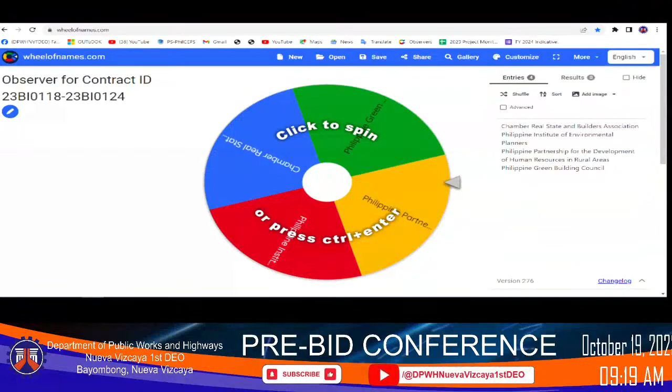Sir, here is the official observer from the Philippine Institute of Environmental Planners, represented by Ms. Ana Maria Pulido, Environmental Planner. Thank you, Engineer Brian Augusto.

So our official observers for the procurement activities for these 7 civil works projects, particularly we have the resident auditor, the representative from the National Philippine Institute of Environmental Planners, represented by Environmental Planner Maria Ana M. Pulido, and the third observer is Engineer Gladys G. Tiburcio, alternate observer for the National Contractors Association of the Philippines Incorporated, Aritao, Nueva Vizcaya. All of the three are not present, but we have already sent them letters, sent through email, and for the auditor we have a receipt.

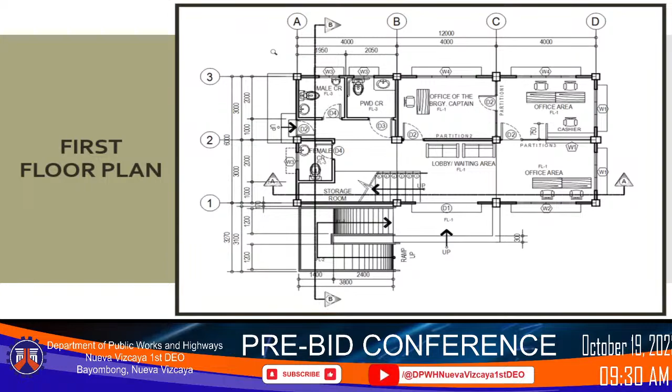So this is the first floor plan. The proposed project is a 12-meter by 6-meter two-story multipurpose building. The design incorporates spaces including the office of the barangay captain, treasury office, open office, and 3 toilets, which will cater to female, male, and PWDs. Next slide please. For the second floor, we have the session hall and the waiting area.

Next slide. This is the front elevation, rear elevation, right side elevation, and left side elevation.

This project will be constructed completely from the foundations, columns, beams, roofing systems, and other finishing. Plumbing systems for water supply and drainage, including sanitary fixtures and pipelines, shall be provided and tapped to the barangay's existing water source. Electrical wirings, outlets, switches, and lighting fixtures shall also be provided. The entire flooring will be installed with unglazed tiles. Ceilings for both exterior and interior shall be installed. Walls will be plastered and painted. This project will be completed within 180 calendar days, inclusive of predetermined Sundays and holidays. That would be all. Thank you.

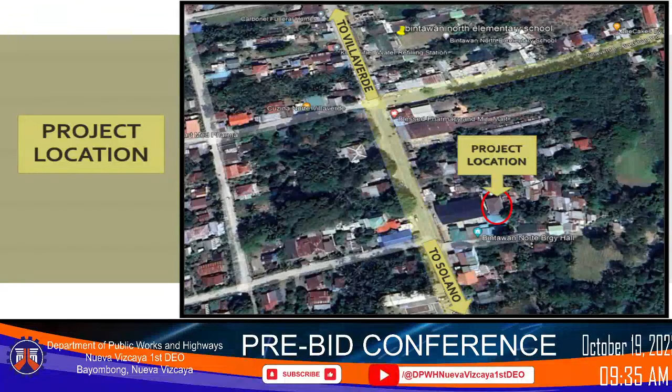The project will involve the completion of a 7.5 meters by 12 meters multi-purpose building located in Bintawan Norte, scheduled to be completed within 85 calendar days. The scope of work will encompass various tasks, including the removal and replacement of the ramp, the provision of wall enclosure and openings at the lobby, as well as the installation of glass partitions on the second floor. All doors within the building's comfort rooms will be replaced, as well as the urinal lavatories, and provision of tileworks and canopy. The project will also address the removal and replacement of damaged lighting fixtures, and comprehensive painting works will be undertaken both in the building's interior and exterior.

Here is the second floor plan. This is the front elevation. Next, the rear elevation, right side elevation, and this is the left side elevation, the section through AA, section through B. That's all. Thank you.

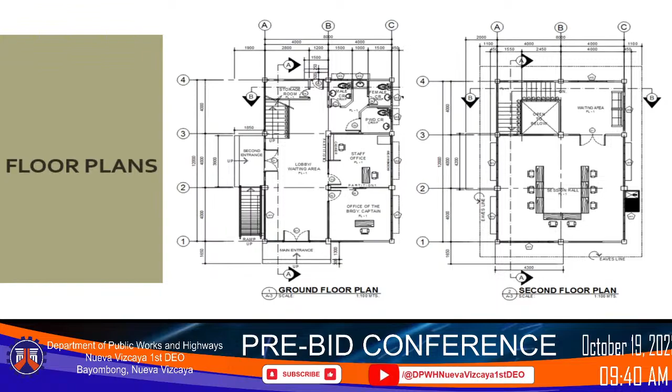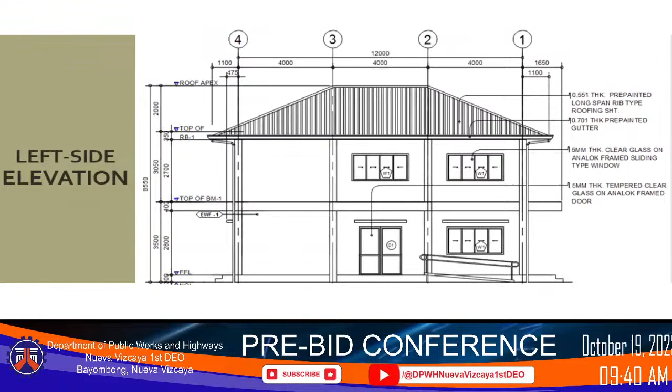Here is the ground floor and second floor plan. This is the front elevation. The rear elevation. This is the right side elevation. Left side elevation. The section through A. Section through B. And that's it. Thank you po.

Again, thank you, Engineer Rojas. So again, may I ask from the Secretariat, does anyone have any questions or clarification from our YouTube live viewers, especially our prospective bidders? None? How about from our prospective bidder present? None?

So let's proceed. Mr. Chair, may I be recognized? Yes, Mr. Vice Chair, you're recognized. The technical personnel who prepared the plans and the program of work mentioned that there are several parts of the building that are exempted.

And then a while ago, she mentioned that the plumbing system is also exempted. No, sir. You mentioned a while ago that the plumbing system... Included po yung plumbing system, sir. Bale yung lighting fixtures, reflective insulation, and oscillating fan are excluded, sir. So meron yung plumbing rough-ins and then plumbing fixtures. Yes, sir. Kasi ang dinig ko kanina is to exclude the plumbing system.

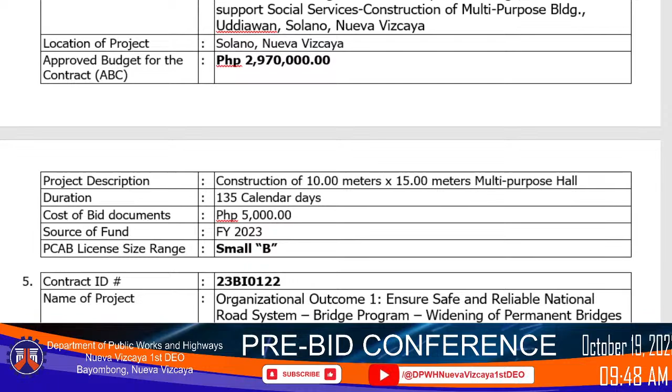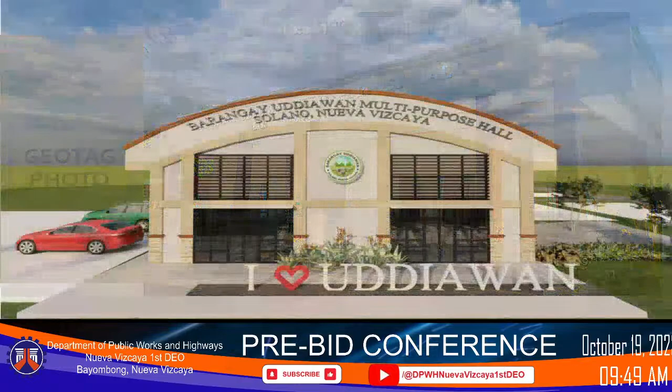Next slide please. Here's the geotag photo of the project location. The project involves a series of construction phases, starting with the removal of the existing slab, making way for the construction of the new structure. So our project will be constructed in front of the existing building.

This necessitates the construction of a solid foundation, the construction of a footing tie beam, and the assembly of beams and columns to support the structure. Furthermore, the project includes installation of the roof framing plan and establishing efficient systems for gutter, storm drainage, and downspouts. Finishings are added, such as plastering and painting for both interior and exterior surfaces. Additionally, integral components like roll-up doors are installed and electrical work is completed, integrating lighting fixtures and wall fans for a fully functional space.

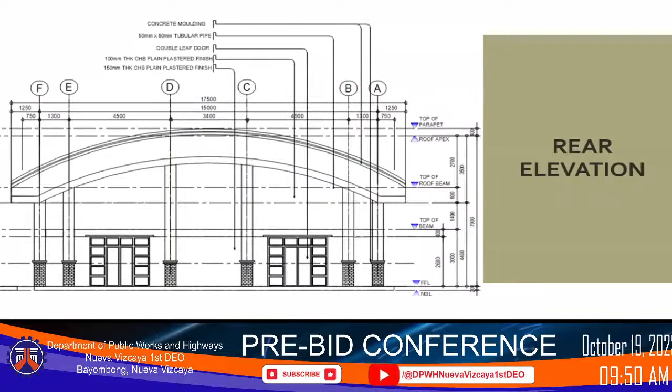Next slide please. So here's the floor plan. This will serve as a function hall. Next slide please. The front elevation, the rear elevation, right side elevation, left side elevation, section A, and section B.

All right, thank you Engineer Maria Angelica de la Cruz for discussing project number 4, the construction of multipurpose building at Uddiawan, Solano, Nueva Vizcaya. From the secretariat, may I ask if anyone from our YouTube live viewers has a question or clarification for this particular project? None. So let's proceed for fellow BAC members.

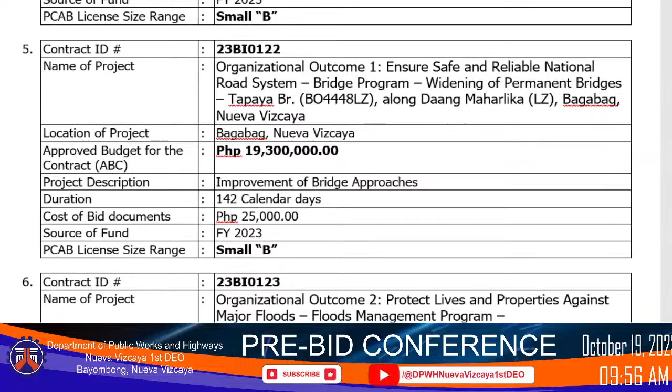Good morning once again. Allow me to present contract ID 23BI0122, Organizational Outcome 1: ensure safe and reliable national road system bridge program, widening of permanent bridges, Tapaya Bridge along Daang Maharlika, Bagabag, Nueva Vizcaya. Approved budget for the contract is 19,300,000, with project description of improvement of bridge approaches, duration of 142 calendar days. Source of fund is FY 2023, with a contractor's license size range of Small B.

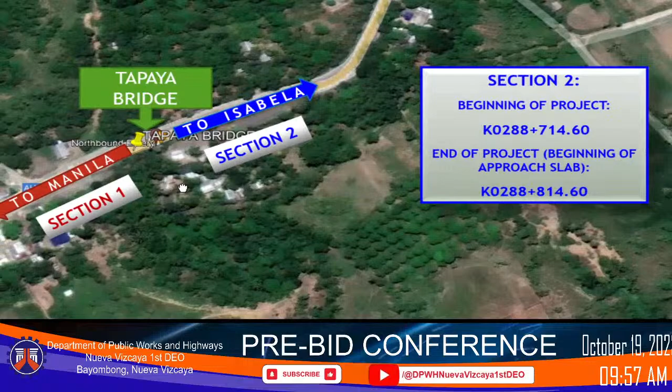On the screen you can see the project location map. The red arrow marks the path leading to Manila, under Section 1, starting at kilometer 288+585 and ending at kilometer 288+685, covering a distance of 100 meters. The blue arrow points to the destination in Isabela, representing Section 2, which begins at kilometer 288+714.6 and concludes at 288+814.6, also spanning 100 meters.

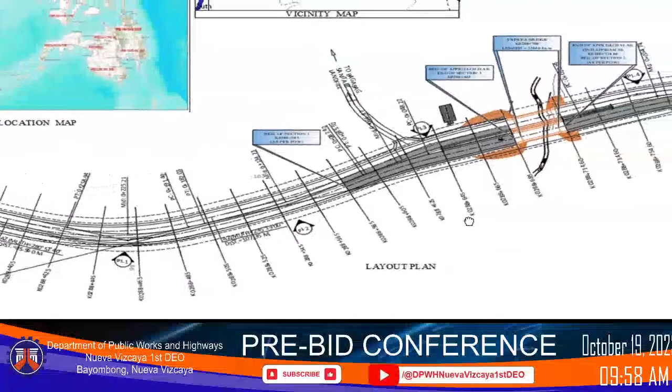Next slide, please. Here is the layout plan. The comprehensive scope of this project entails the following: in Section 1, the work comprises replacing 0.1 lane kilometer of the left side inner lane carriageway with 300mm thick PCCP, pouring concrete for 0.2 lane kilometer of the right side of both inner and outer lane carriageways, constructing a 1.5-meter wide shoulder with 230mm thickness, erecting curb and gutter infrastructure, and implementing road protection measures by installing guardrails.

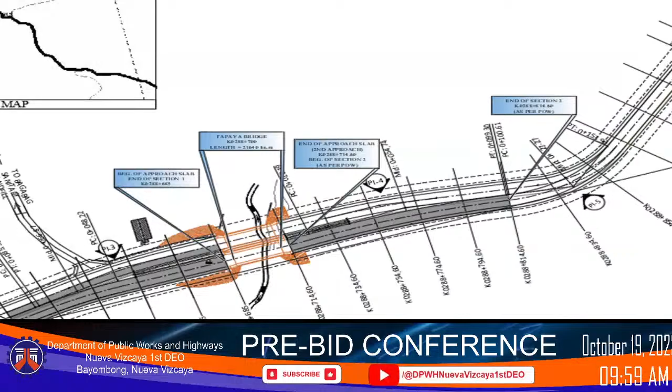At Section 2, it involves extending concrete work for 0.2 lane kilometers on the right side of the inner and outer carriageways, creating a U-shaped lined canal to enhance drainage, and adding guardrails for safety and protection works. Additionally, the project includes installing solar lighting systems in the median for improved visibility and safety, and implementing slope protection measures with rubble concrete downstream of the river to prevent erosion and ensure structural integrity.

The aggregate will originate from the Baretbet Quarry, situated roughly 4.8 kilometers from the project site, while materials will be sourced from Bagabag, Nueva Vizcaya, approximately 7 kilometers from the project site. Next slide, please.

Next slide, please. Here are the geotagged photos of the project, with a geotag description of 16 degrees 36 minutes 29 seconds north and 121 degrees 16 minutes 57 seconds east.

Next slide, please. This is the typical roadway section with normal super elevation. Next slide, please. And the typical roadway section with super elevation.

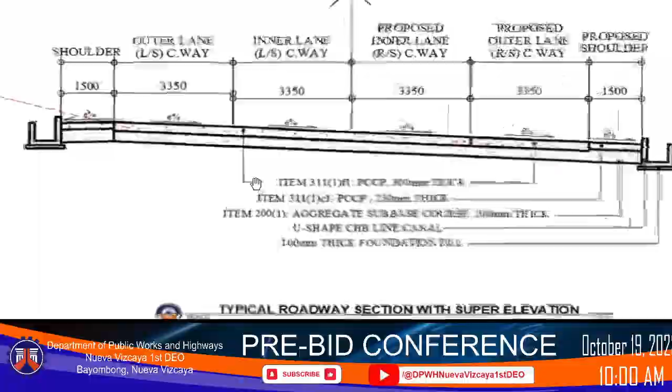That would be all, sir. Thank you.

Thank you, Engineer Maria Angelica de la Cruz, for discussing the project with contract ID 23BI0122. May I ask the Secretariat, does anyone from our YouTube live viewers have questions or clarifications regarding this project? None. So let's proceed.

Mr. Chair, may I be recognized again? Yes, Mr. Vice Chair, Engineer Danilo A. Bernabe, you are recognized. Engineer De La Cruz mentioned a while ago about the curb and gutter.

Do we have a curb and gutter? Yes, sir. What is the type of concrete curb and gutter to be constructed in the proposed construction of approaches? Precast curb and gutters. It's precast. As shown on our screen, may kurbada ito.

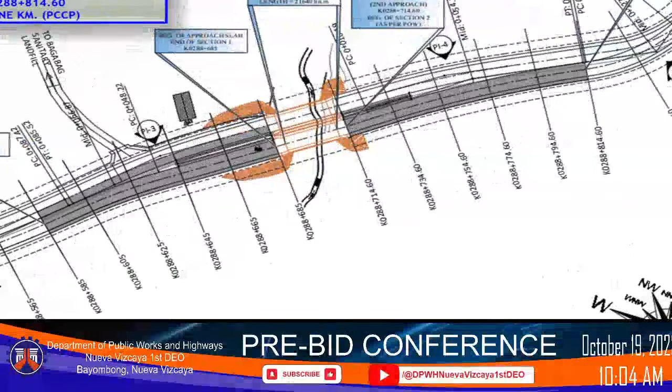Okay, that's clarification, Mr. Chair, may I again be recognized?

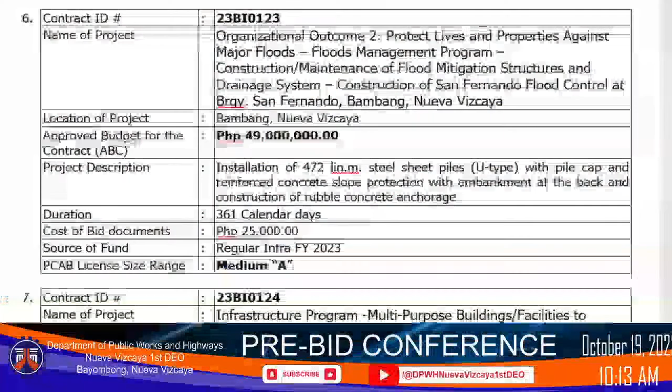Good morning to everyone. Thank you, Mr. Chair. I'm Marston Degamo, prepared the plan of the project. Contract ID number is 23BI0123. Name of project: organizational outcome 2, protect lives and properties against major floods, floods management program, construction/maintenance of flood mitigation structures and drainage system, construction of San Fernando flood control at Barangay San Fernando, Bambang, Nueva Vizcaya. Location of the project: Bambang, Nueva Vizcaya. Approved budget for the contract is 49 million pesos only. Project description: installation of 472 linear meter steel sheet pile U-type with pile cap and reinforced concrete slope protection with embankment at the back and construction of rubble concrete for anchorage. Duration of the project is 361 calendar days. Cost of bid documents is 25,000 pesos only. Source of fund: regular infra for year 2023. PCAB license size range: medium A.

Next page, please. Hello.

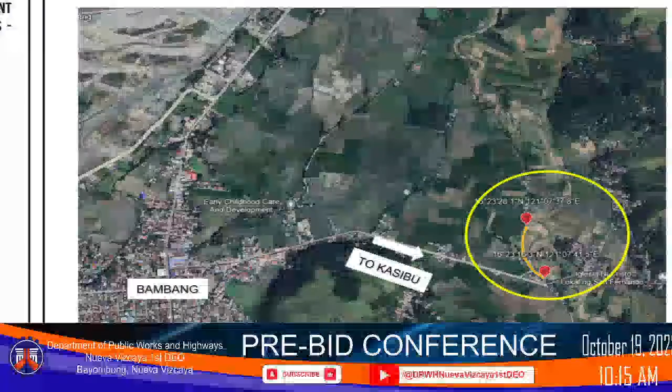Okay, this is a satellite view location map showing the project. It is almost 3 kilometers away from Bambang proper. The project is located along Bambang Kasibu Quezon Road.

Next slide, please. This is a more detailed satellite view of the project. The project will be connected to the abutment A of the San Fernando Bridge downstream.

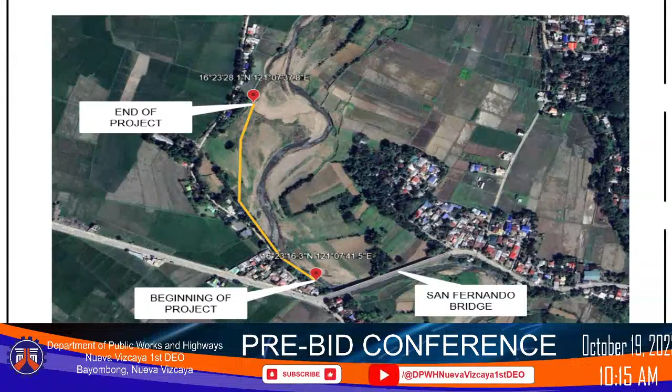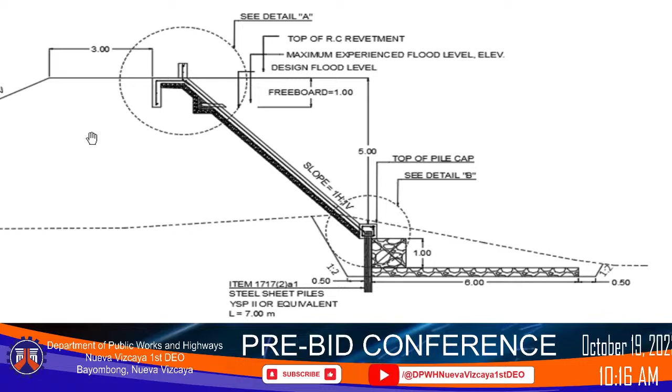This is a detail of the concrete slope, typical plan of every section. It will be showing the concrete slope protection with a height of 5 meters, a pile cap with a dimension of 0.50 by 0.50, with a steel sheet pile with a length of 7 meters. The total height from the top of the pile cap to the top of the parapet is 5.5, its total length, regardless of the pile cap and the length of the sheet pile.

Next slide, please. This is a more detailed picture of the concrete parapet showing its dimension 0.5 by 0.25 for its thickness, and it will be provided with 100 mm diameter weep holes spaced at 2 meters apart.

Next slide, please. This is an isometric view of the complete project section, which comprises the cut-off wall. The distance of every cut-off wall would be 50 meters.

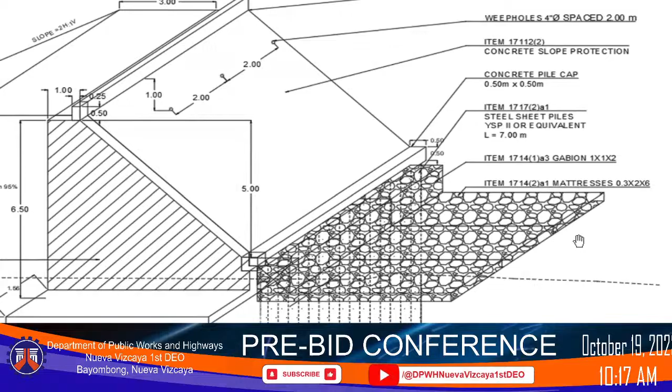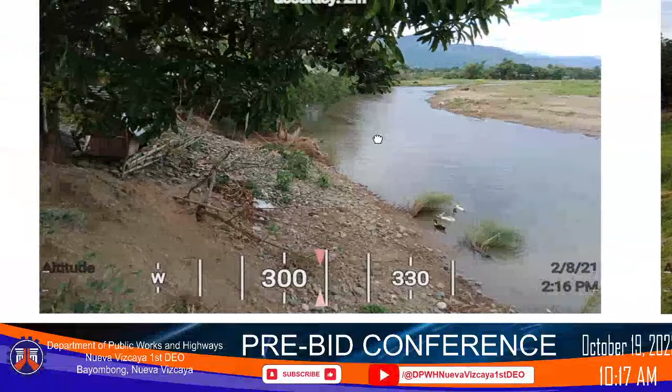This is a geotagged photo. At the left side is the beginning of the project, which will be connected to an existing rubble concrete structure. At the right side is the end of the project.

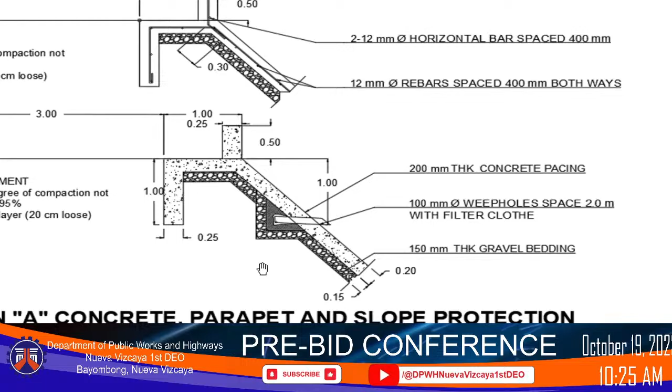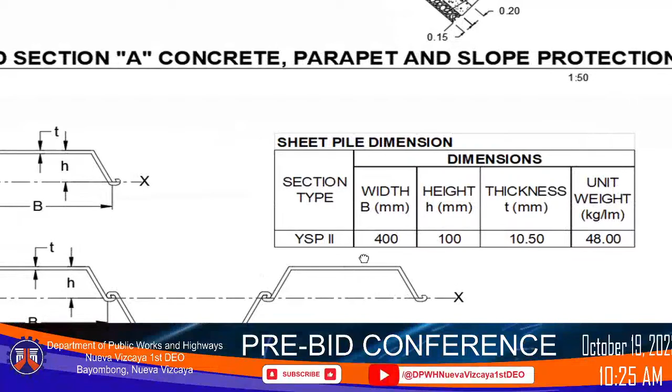Please discuss the detail of the sheet piles, since it wasn't discussed yet. The design sheet pile to be used, as shown, the width of the sheet pile is 400 mm, and the thickness of the plate is 10.50 mm. The height is 100, and combining it, the total is about 0.2 or 200, which fits our pile cap dimension of 50. That's all, Mr. Chair, thank you.

Thank you, Mr. Vice Chair, Engineer Danilo Ibernampe, for the clarification answered by our preparer, Engineer Marston Degamo. Now, fellow BAC members, let's start from the Planning and Design section. Engineer Jerwin Buenavista, do you have any other amendment for this particular project?

Mr. Chair, I have an amendment regarding the ABC. Since this project was released from the central office and implemented by our office, the ABC decreased from 49 million to 48 million 250,000, a decrease of 750,000. We also have a revision in the length of the project from 472 linear meters to 400 linear meters, to accommodate the ABC.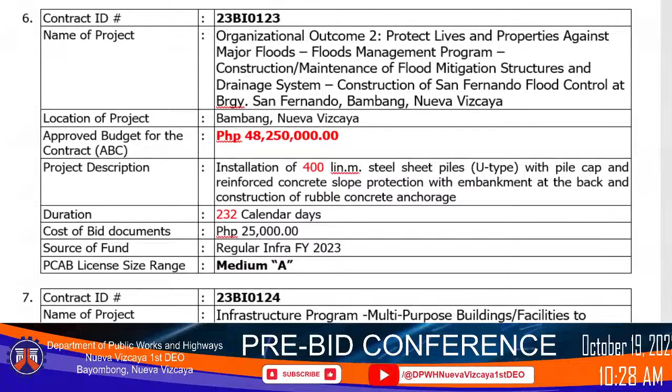That's all, Mr. Chair. Okay, thank you, Engineer Jerwin Buenavista from the Planning and Design Section for the amendment to this project, since there is already a received SARO, so we need to revise the ABC, the project description, and the duration. Any other amendments from the construction section? Engineer Bayani Molina? No amendments, sir, as discussed by Engineer Jerwin Buenavista.

Okay, noted. Architect Ivy Salazar, provisional member for all types of procurement, any amendment? I have no amendment, sir. Okay, noted. Madam Veronica Leodopico, any amendment? I have no amendment, Mr. Chair, but I hope we all take note of the amendment of Engineer Buenavista. Okay, noted, Madam Veron. Our BAC Vice Chair, Engineer Danilo Ibernampe? No amendments, Mr. Chair, I'll go with the amendment presented by Engineer Jerwin Buenavista.

Okay, noted. Thank you. Please take note, Secretariat Engineer Brian Neil Augusto, to amend the ABC from 49 million to 48,250,000, and for the project, the length from 472 linear meters to 400 linear meters, and for the duration from 361 calendar days to 232 calendar days. This is the amendment for the basic contract data as advertised.

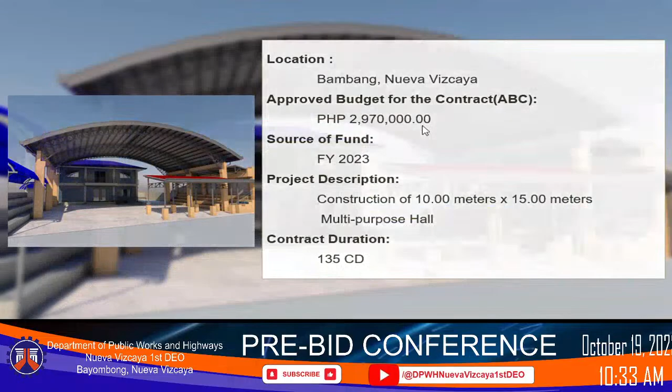As shown on the screen is the perspective of the proposed multipurpose building with bleachers on the right side and a shed on the right front of the covered court.

The scope of work for this project includes the construction of foundation to concrete column with plastering and paintings, construction of steel pipe truss with roofing sheet, flashing and gutter, construction of bleachers on the right side of the covered court with plastering and paintings, the shed on the right front of the covered court with plastering and paintings, CHB canal with steel grating on both sides of the covered court, and electrical works including wires and lighting fixtures.

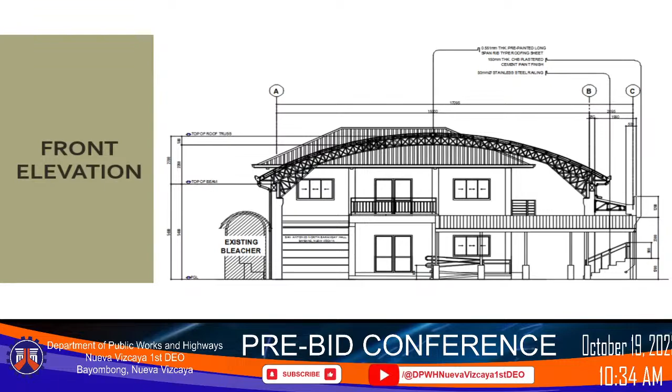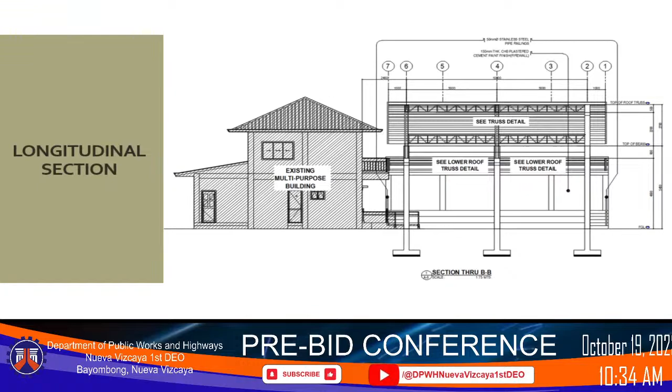This is the front elevation of the multipurpose building. This is the rear elevation, left side elevation, right side elevation, cross section, longitudinal section. For the source of aggregate for this project is from Kupas Quarry, and the source of material is from Bambang Town proper. That's all.

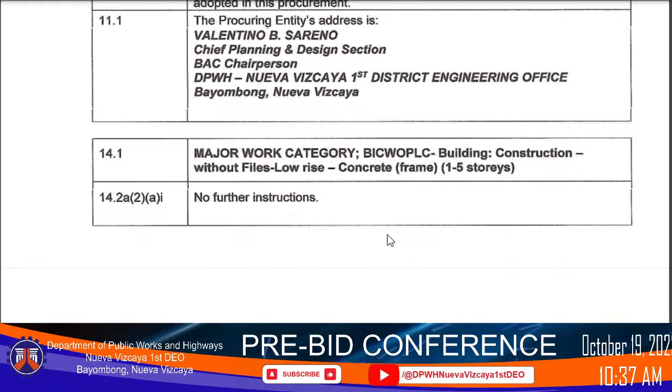For ITB clause, instruction to bidders clause 14.2A for B, the minimum work experience requirements for the key personnel are the following: project manager, project engineer, materials engineer, foreman, and safety officer. Minimum years of similar work experience in the same position is 3 years. Minimum years of total work experience in the same position is 3 years. Accredited safety officer required upon issuance of notice of award, subject to Department Order Number 98, Series of 2014, submission of Construction Safety and Health Program approved by the Department of Labor and Employment, or DOLE.

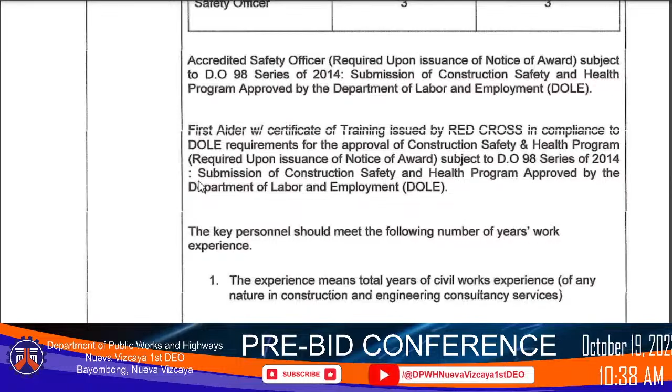For ITB clause 14.2A4, the minimum major equipment requirements are the following: plate compactor, required unit is 1; one bagger mixer, required unit is 1; bar cutter, required unit is 1; bar bender, required unit is 1; welding machine, diesel or gas driven, required unit is 1; cutting outfit, required unit is 1; dump truck, required unit is 1; concrete saw, required unit is 1; and portable breaker, required unit is 1.

For the laboratory equipment, please refer to Department Order Number 11, Series of 2017, for the minimum materials testing equipment, and Department Order Number 127, Series of 2018, strict application of Republic Act 9184, on the conduct of post-qualification of bidders with delayed ongoing contracts within the DPWH.

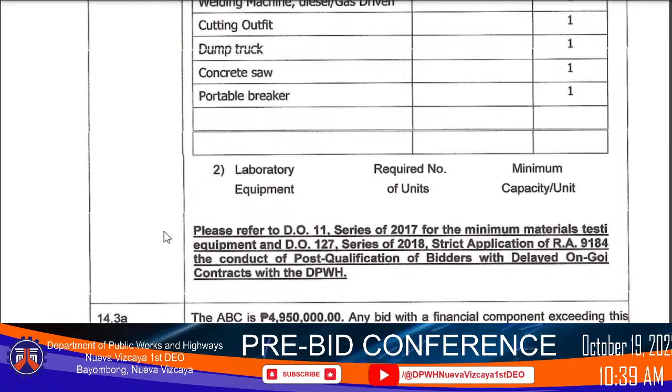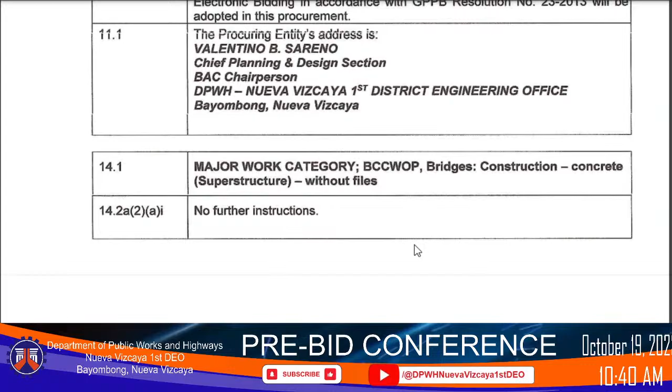For ITB clause 14.2A4B, the minimum work experience requirements for key personnel: project manager, project engineer, materials engineer, foreman, and safety officer. Minimum years of similar experience, same position, is 3 years. Minimum total work experience, same position, is 3 years. Accredited safety officer required upon issuance of notice of award, subject to Department Order number 98, series of 2014, submission of construction safety and health program approved by the Department of Labor and Employment, DOLE.

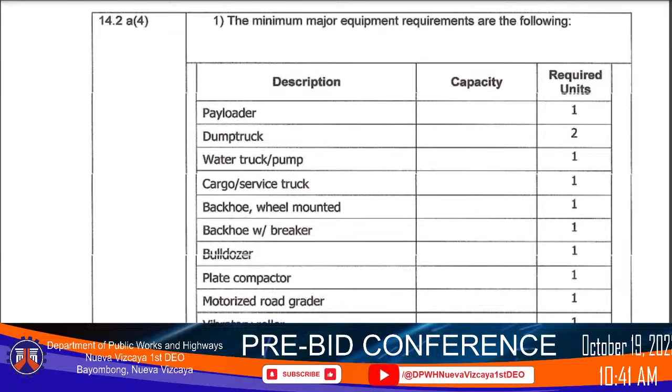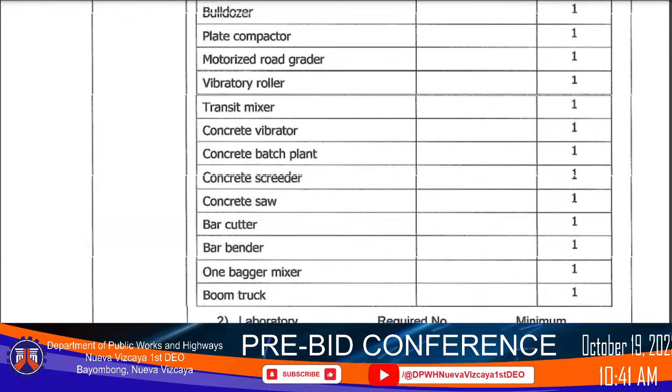For ITB clause 14.2A4, the minimum major equipment requirements: payloader, 1 unit; dump truck, 2 units; water truck pump, 1 unit; cargo service truck, 1 unit; backhoe wheel mounted, 1 unit; backhoe with breaker, 1 unit; bulldozer, plate compactor, motorized road grader, 1 unit each; vibratory roller, transit mixer and concrete vibrator, 1 unit each; concrete batch plant, 1 unit; concrete screeder, concrete saw, bar cutter, 1 unit each; bar bender, 1 bagger mixer and boom truck, 1 unit each.

For the laboratory equipment, please refer to DO11 series of 2017 for the minimum materials testing equipment, and Department Order number 127 series of 2018, for strict application of Republic Act 9184, the conduct of post-qualification of bidders with delayed ongoing contracts with DPWH.

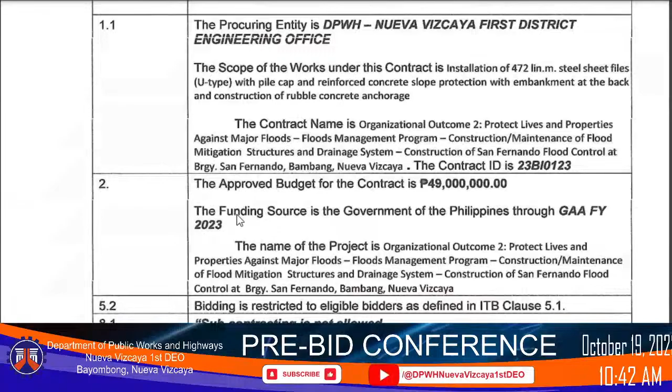For contract ID number 23BI0123, Allen, with the name of the project: construction of San Fernando Flood Control at Barangay San Fernando, Bambang, Nueva Vizcaya. For ITB clause 14.2A to A1, major category of works: flood control construction, slope protection using structural measures.

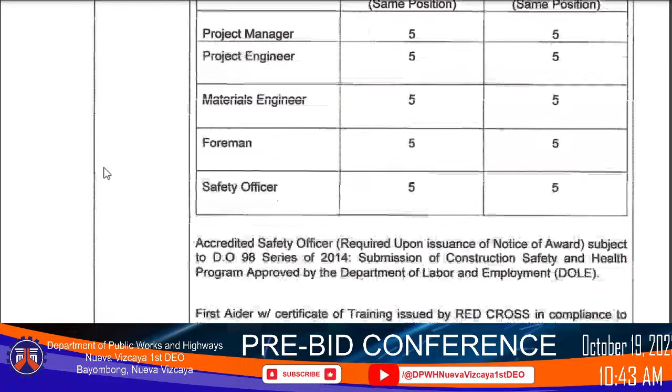For ITB clause 14.2A4B, the minimum work experience requirements for key personnel: project manager, project engineer, materials engineer, foreman, and safety officer. Minimum years of similar experience, same position, is 5 years. Minimum years of total work experience, same position, is 5 years. Accredited safety officer required upon issuance of notice of award, subject to Department Order number 98, series of 2014, submission of construction safety and health program approved by the Department of Labor and Employment, DOLE.

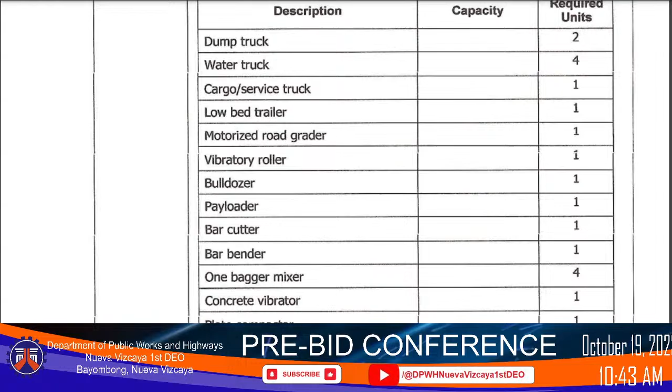For ITB clause 14.2A4, the minimum major equipment requirements: dump truck, 2 units; water truck, 4 units; cargo service truck, low bed trailer, motorized road grader, 1 unit each; vibratory roller, bulldozer and payloader, 1 unit each; bar cutter, bar bender, 1 unit each; 1 bagger mixer, 4 units; concrete vibrator and plate compactor, 1 unit each; backhoe, 4 units; crawler crane, 1 unit; vibro hammer, welding machine and cutting outfit, 1 unit each.

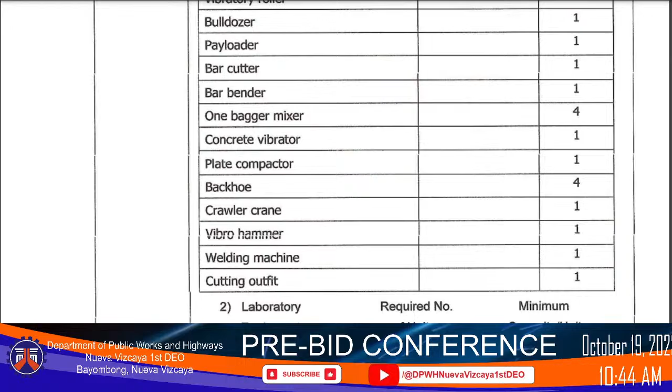For the laboratory equipment, please refer to DO11 series of 2017 for the minimum materials testing equipment, and Department Order number 127 series of 2018, for strict application of Republic Act 9184, the conduct of post-qualification of bidders with delayed ongoing contracts with DPWH.

Sir, that's all for the requirement of the bidding documents for the 7 civil works projects, to wit.

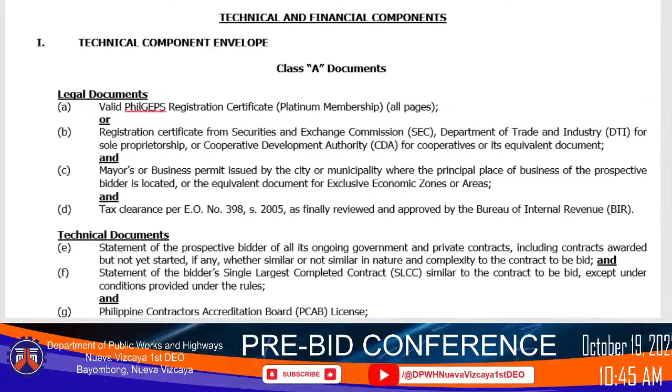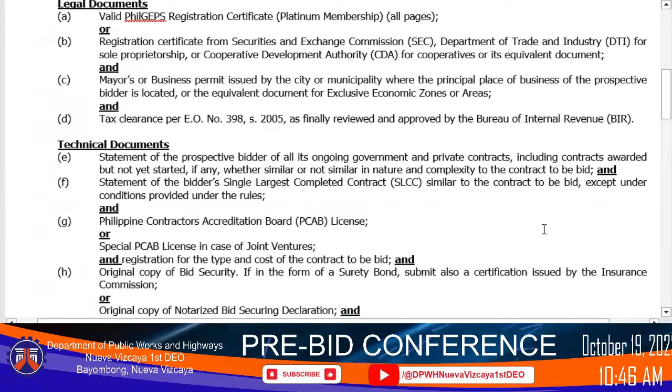Technical and financial components, number 1: Technical component envelope, Class A documents. For legal documents, letter A, valid PhilGEPS registration certificate, platinum membership, all pages. Or letter B, registration certificate from Securities and Exchange Commission, Department of Trade and Industry for sole proprietorship, or Cooperative Development Authority for cooperatives, or its equivalent document. And letter C, mayor's or business permit issued by the city or municipality where the principal place of business of the prospective bidder is located, or the equivalent document for exclusive economic zones or areas. And letter D, tax clearance per EO number 398, series of 2005, as finally reviewed and approved by the Bureau of Internal Revenue. For technical documents, letter E, statement of the prospective bidder of all its ongoing government and private contracts, including contracts awarded but not yet started, if any, whether similar or not similar in nature and complexity to the contract to be bid.

And letter F, a statement of the bidder's single largest completed contract, or SLCC, similar to the contract to be bid, except under conditions provided under the rules. And letter G, Philippine Contractors Accreditation Board or PCAB license, or special PCAB license in case of joint ventures, and registration for the type and cost of the contract to be bid.

And letter H, original copy of bid security in the form of surety bond. Submit also the certification issued by the Insurance Commission, or original copy of notarized bid securing declaration.

And letter I, project requirements, which shall include the following. First, organizational chart for the contract to be bid. Second, list of contractors' key personnel, for example, project manager, project engineers, materials engineers, safety officer, and foreman, to be assigned to the contract to be bid, with their complete qualification and experience data.

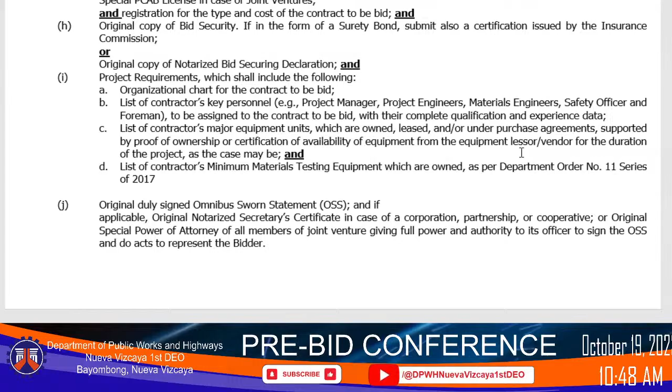Third, list of contractors' major equipment units which are owned, leased, and or under purchase agreements, supported by proof of ownership or certification of availability of equipment from the equipment lessor, vendor, for the duration of the project as the case may be. And last, list of contractors' minimum material testing equipment which are owned as per Department Order Number 11, Series of 2017. For letter J, original duly signed Omnibus Sworn Statement or OSS, and if applicable, original notarized secretary's certificate in case of corporation, partnership, or cooperatives.

Or original special power of attorney of all members of joint venture, giving full power and authority to its officer to sign the OSS and to do acts to represent the bidder. For financial documents, letter K, the prospective bidder's audited financial statements showing, among others, the prospective bidder's total and current assets and liabilities.

Stamped received by the BIR or its duly accredited and authorized institutions for the preceding calendar year, which should not be earlier than 2 years from the date of bid submission. And letter L, the prospective bidder's computation of net financial contracting capacity or NFCC, Class B documents.

Letter M, if applicable, duly signed joint venture agreement or JVA in accordance with the Republic Act number 4566 and its IRR in case the joint venture is already in existence, or duly notarized statement from all the potential joint venture partners stating that they will enter into and abide by the provisions of the JVA in the instance that the bid is successful.

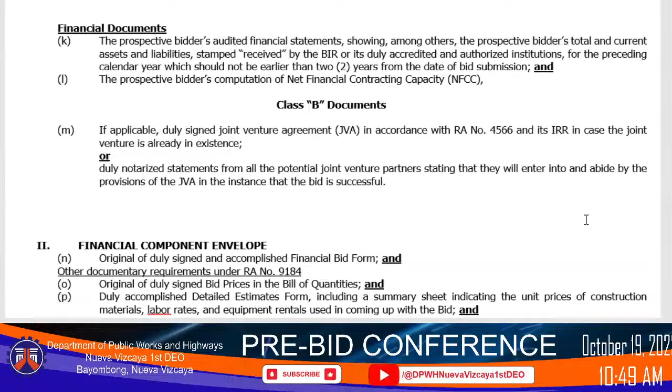Number 2, financial component envelope. Letter N, original of duly signed and accomplished financial bid form and other documentary requirements under Republic Act Number 9184. Letter O, original of duly signed bid prices in the Bill of Quantities. Letter P, duly accomplished detailed estimate form, including a summary sheet indicating the unit prices of construction materials, labor rates,

And equipment rental used in coming up with the bid. And letter Q, cash flow by quarter. Sir, that's all for the agenda number 3 for the documents to be submitted by the bidders, including technical and financial proposals. Thank you.

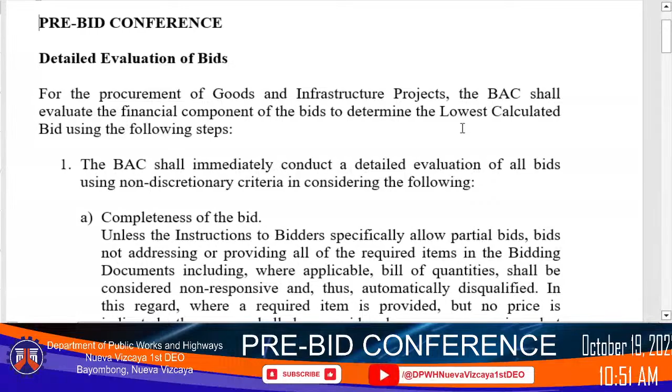Pre-bid conference. Detailed evaluation of bids. For the procurement of goods and infrastructure projects, the BAC shall evaluate the financial component of the bids to determine the lowest calculated bid using the following steps. The BAC shall immediately conduct a detailed evaluation of all bids using non-discretionary criteria in considering the following.

Completeness of the bid. Unless the instructions to bidders specifically allow partial bids, bids not addressing or providing all of the required items in the bidding documents, including, where applicable, bill of quantities, shall be considered non-responsive and thus automatically disqualified. In this regard, where a required item is provided but no price is indicated, the same shall be considered as non-responsive. But specifying 0 or a dash for the said item would mean that it is being offered for free to the government, except those required by law or regulations to be provided for.

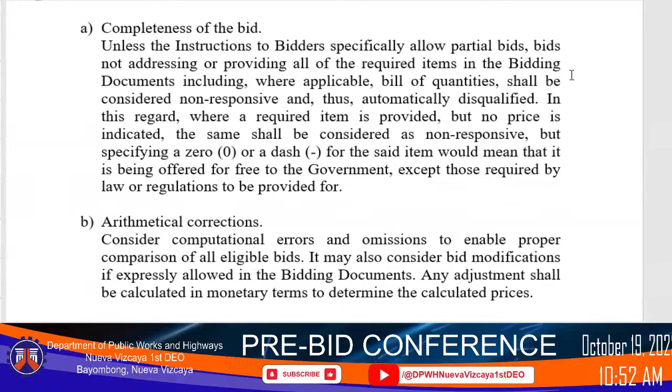Arithmetical corrections. Consider computational errors and omissions to enable proper comparison of all eligible bids. It may also consider bid modifications if expressly allowed in the bidding documents. Any adjustment shall be calculated in monetary terms to determine the calculated prices.

The BAC shall evaluate all bids on an equal footing to ensure fair and competitive bid comparison. For this purpose, all bidders shall be required to include the cost of all taxes, such as, but not limited to, value-added tax, income tax, local taxes, and other fiscal levies and duties, which shall be itemized in the bid form and reflected in the detailed estimates. Such bids, including said taxes, shall be the basis for bid evaluation and comparison.

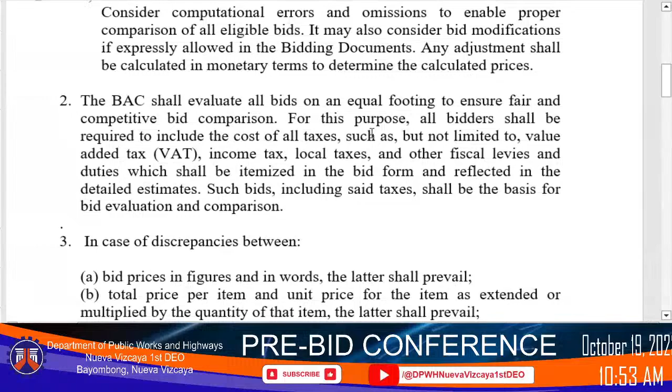In case of discrepancies between bid prices in figures and in words, the latter shall prevail. Between total price per item and unit price for the item as extended or multiplied by the quantity of that item, the latter shall prevail. Between stated total price and the actual sum of prices of component items, the latter shall prevail. Between unit cost in the detailed estimate and unit cost in the bill of quantities, the latter shall prevail.

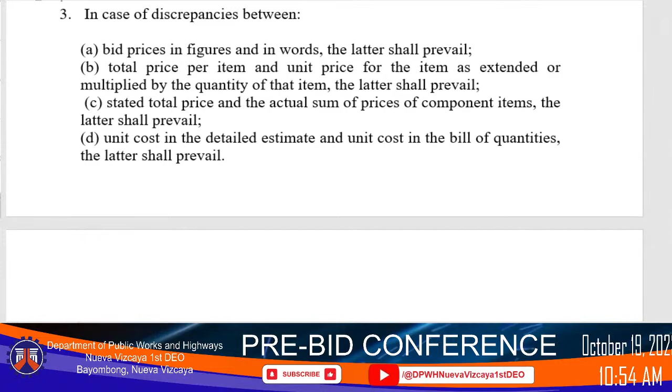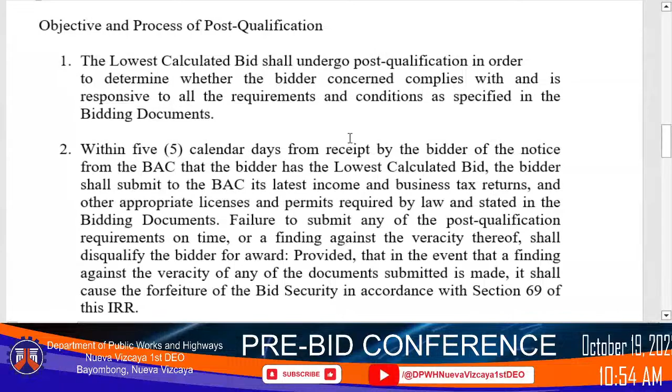Post-qualification: objective and process of post-qualification. The lowest calculated bid shall undergo post-qualification in order to determine whether the bidder concerned complies with and is responsive to all the requirements and conditions as specified in the bidding documents.

Within 5 calendar days from receipt by the bidder of the notice from the BAC that the bidder has the lowest calculated bid, the bidder shall submit to the BAC its latest income and business tax returns and other appropriate licenses and permits required by law and stated in the bidding documents.

Failure to submit any of the post-qualification requirements on time, or a finding against the veracity thereof, shall disqualify the bidder for award, provided that in the event that a finding against the veracity of any of the documents submitted is made, it shall cause the forfeiture of the bid security in accordance with Section 69 of this IRR.

The post-qualification shall verify, validate, and ascertain all statements made and documents submitted by the bidder with the lowest calculated bid using non-discretionary criteria as stated in the bidding documents. These criteria shall consider but shall not be limited to the following.

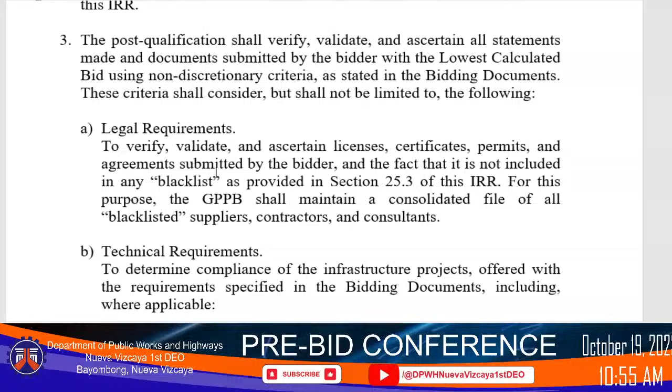Legal requirements: to verify, validate, and ascertain licenses, certificates, permits, and agreements submitted by the bidder, and the fact that it is not included in any blacklist as provided in Section 25.3 of this IRR. For this purpose, the GPPB shall maintain a consolidated file of all blacklisted suppliers, contractors, and consultants.

Technical requirements: to determine compliance of the infrastructure projects offered with the requirements specified in the bidding documents, including, where applicable, verification and validation of the bidder's stated competence and experience, and the competence and experience of the bidder's key personnel to be assigned to the project for the procurement of infrastructure projects.

Verification of availability and commitment and/or inspection and testing for the required capacities and operating conditions of equipment units to be owned, leased, under, or purchased by the bidder for use in the contract.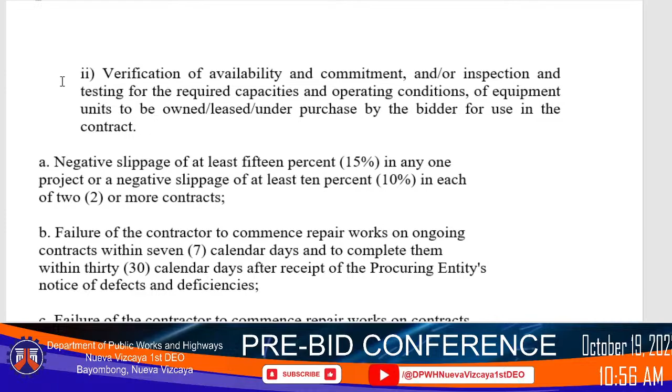Negative slippage of at least 15% in any one project, or a negative slippage of at least 10% in each of 2 or more contracts.

Failure of the contractor to commence repair works on ongoing contracts within 7 calendar days and to complete them within 30 calendar days after receipt of the procuring entity's notice of defects and deficiencies.

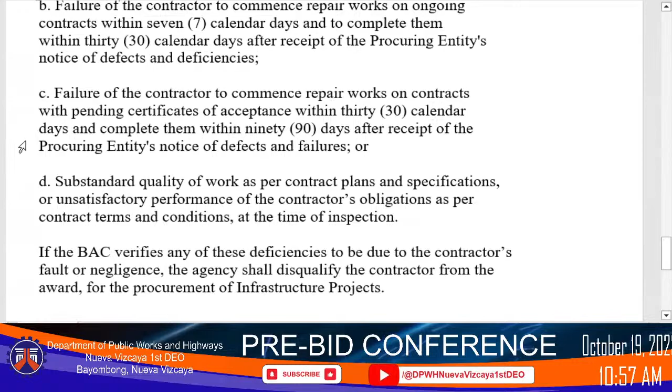Failure of the contractor to commence repair works on contracts with pending certificates of acceptance within 30 calendar days and complete them within 90 days after receipt of the procuring entity's notice of defects and failures, or substandard quality of work as per contract plans and specifications, or unsatisfactory performance of the contractor's obligations as per contract terms and conditions at the time of inspection.

If the BAC verifies any of these deficiencies to be due to the contractor's fault or negligence, the agency shall disqualify the contractor from the award for the procurement of infrastructure projects.

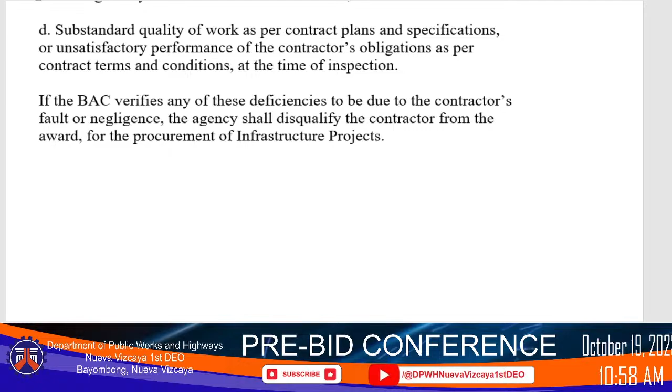That's all, sir. Thank you.

Thank you, Architect IB Salazar, for the pre-recorded presentation for agenda number 4, which is the criteria and procedure for the preliminary examination of bids, detailed evaluation of bids, post-qualification, and award.

So let's proceed to agenda number 5, which is questions and comments from bidders, and replies of the BAC and other representatives of the procuring entity.

May I ask the Secretariat, does anyone have any amendment to the provisions of the bidding documents as discussed and presented? None? So since we have no amendment for this, we'll adopt the provision of the bidding documents for the 7 projects.

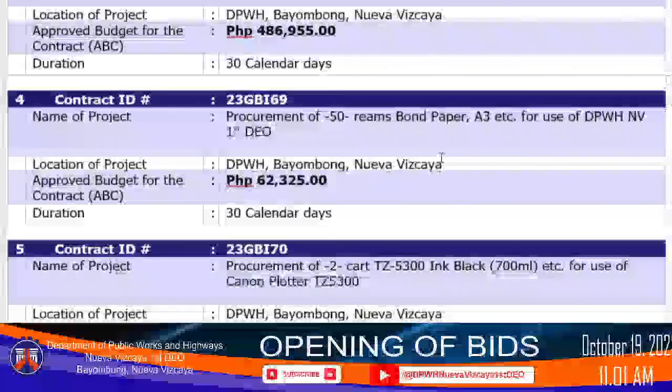The fourth quotation, with contract ID number 23GBI69, procurement of 50 reams bond paper, A3, etc. for use of DPWH Nueva Vizcaya First District Engineering Office. Location of the project is Bayombong, DPWH Bayombong, Nueva Vizcaya, with an approved budget for the contract or ABC of 62,325 pesos. Duration is 30 calendar days.

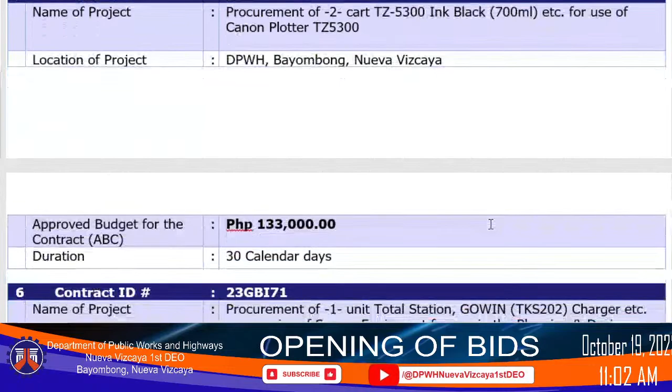The fifth quotation, with contract ID number 23GBI70, procurement of 2 cart TZ5300 ink black 700ml, etc. for use of Canon plotter TZ5300. Location of the project is DPWH Bayombong, Nueva Vizcaya, with an approved budget for the contract of 133,000 with a duration of 30 calendar days.

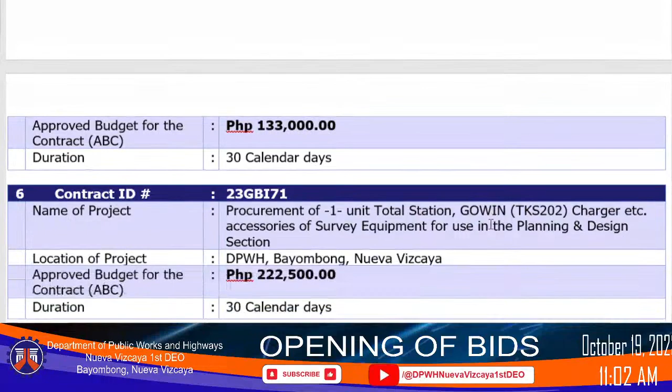The sixth quotation, with contract ID number 23GBI71, procurement of 1 unit total station, GoWin TKS202, charger, etc., accessories of survey equipment for use in the planning and design section. Location of the project is Bayombong, Nueva Vizcaya, with an approved budget for the contract of 222,500 pesos only, with contract duration of 30 calendar days.

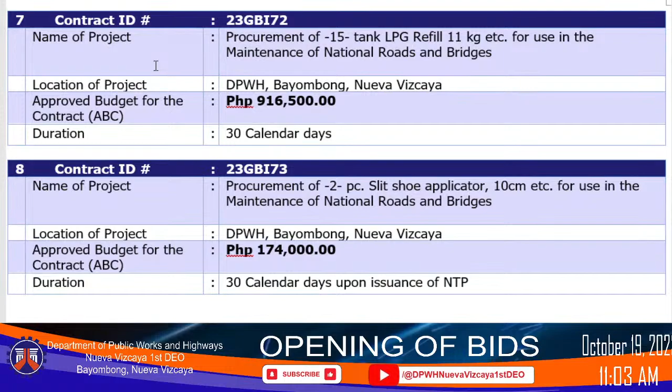The seventh quotation, with contract ID number 23GBI72, procurement of 15 tanks LPG refill, 11 kilograms, etc. for use in the maintenance of national roads and bridges. Location of the project is DPWH Bayombong, Nueva Vizcaya, with an approved budget for the contract of 916,500 pesos with the contract duration of 30 calendar days.

The last quotation is with contract ID number 23GBI73, procurement of 2-piece slit shoe applicator, 10 cm, etc. for use in the maintenance of national roads and bridges. Location of the project is DPWH Bayombong, Nueva Vizcaya, with approved budget for the contract or ABC of 174,000 pesos, with a project duration of 30 calendar days upon issuance of NTP. That's all for the 8 goods and services through quotations. Thank you.